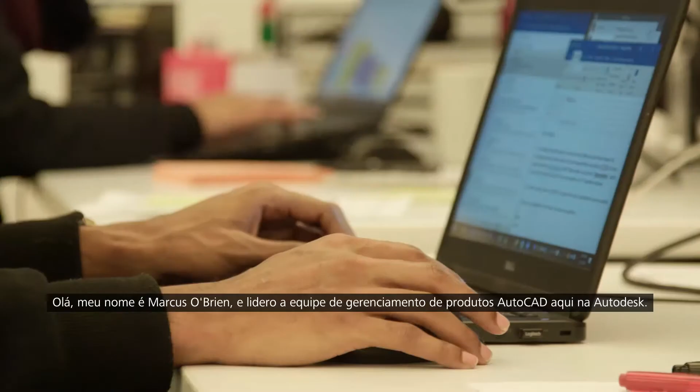Hi, my name is Marcus O'Brien and I lead the AutoCAD product management team here at Autodesk. We create software used by the most cutting-edge architects, engineers and designers from around the world. And this year our software allows you to push the boundaries even further.

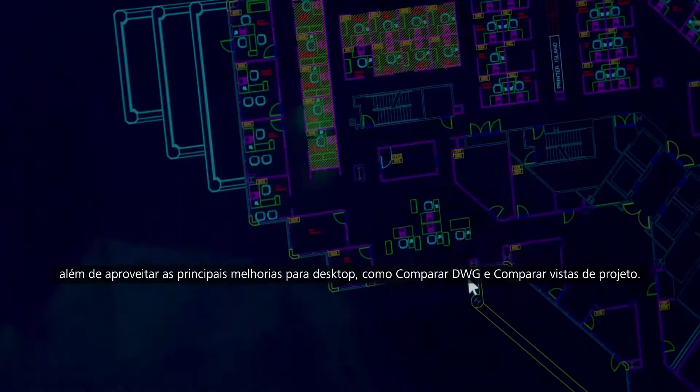When you subscribe to AutoCAD, you gain access to a library of specialized tool sets. You can take your work with you wherever you go with AutoCAD web and mobile apps, and enjoy core desktop enhancements like DWG Compare and shared design views. Today I'll show you how you can put the power of one AutoCAD to work for you.

Over the past 20 years, we've been investing in specialized tool sets to help make your AutoCAD as personalized an experience as possible. Today, I'm delighted to announce the next step in that evolution. When you subscribe to AutoCAD 2019, you get access to all AutoCAD industry-specific specialized tool sets, from mechanical to architecture to electrical design and more. Subscribing to AutoCAD, you'll always have the right tool at hand while working in a familiar AutoCAD interface.

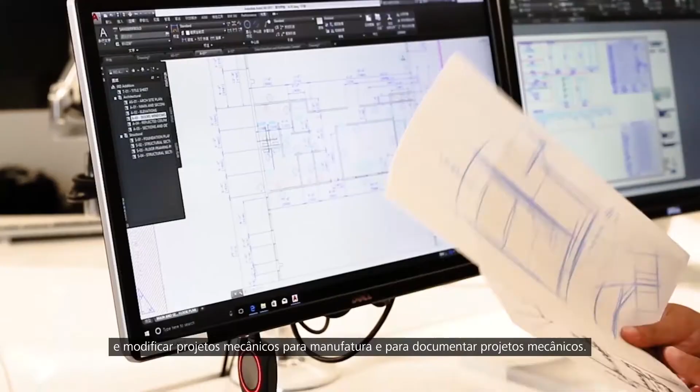So, how can AutoCAD, including specialized tool sets, help you work smarter and faster? Maybe you need a library of standards-based parts and tools for creating and modifying mechanical designs for manufacturing and documenting mechanical designs. The AutoCAD Mechanical Toolset allows you to automate mechanical engineering tasks such as generating machine components, dimensioning, and creating bills of materials, as well as access to 700,000 plus intelligent manufacturing parts, features, and symbols.

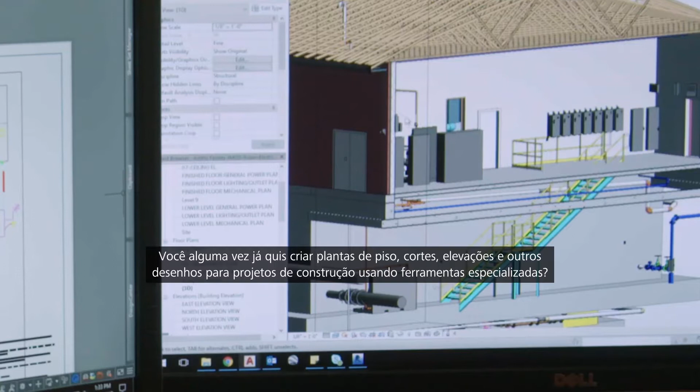Have you ever wanted to create floor plans, sections, elevations, and other drawings for building design using specialized tools? Why not take advantage of the included AutoCAD Architecture Toolset, which adds more than 8,000 intelligent architectural objects and styles and features specifically for architects?

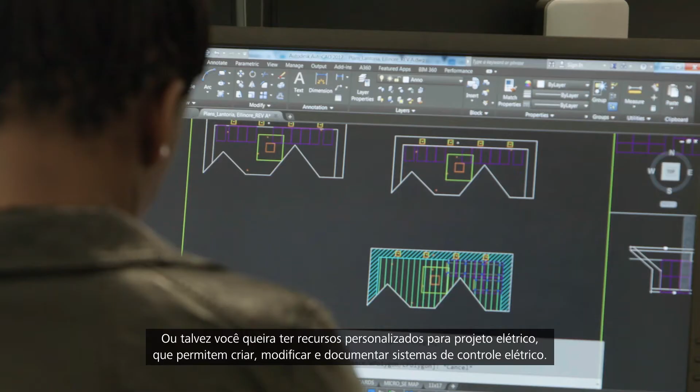Or maybe you wish you had features tailored to electrical design, enabling you to create, modify, and document electrical control systems. By installing the included AutoCAD Electrical Toolset, you can create panel layouts, schematic diagrams, and other electrical drawings using a library of 65,000 plus intelligent electrical symbols. In addition, you'll have access to MEP, 3D plant design, mapping, and raster design tool sets and libraries.

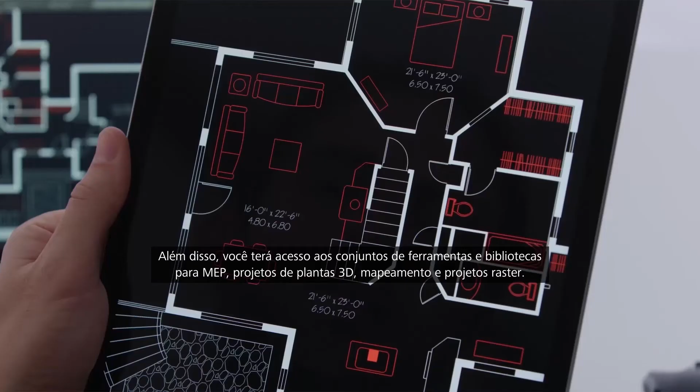Customers that currently subscribe to AutoCAD already have access to the AutoCAD mobile app, but this year we're adding more. As part of your subscription, you'll get access to the new addition to the AutoCAD family, the AutoCAD web application. For the first time, you can access original AutoCAD directly in your web browser.

The AutoCAD web app enables you to create, view, and edit your CAD drawings in a web browser from any device. There's nothing to download. Simply go to web.autocad.com and log in to get access. All the work that you do in the AutoCAD web app is accessible when you switch devices, so you can pick up where you left off when you work from home or off-site.

To make the most of the web and mobile apps, when accessing AutoCAD 2019 from the desktop environment, there's a new Save to Web and Mobile capability, which enables users to save drawings and make them available on a web browser and mobile device. In AutoCAD 2019, we've added new features and enhanced others.

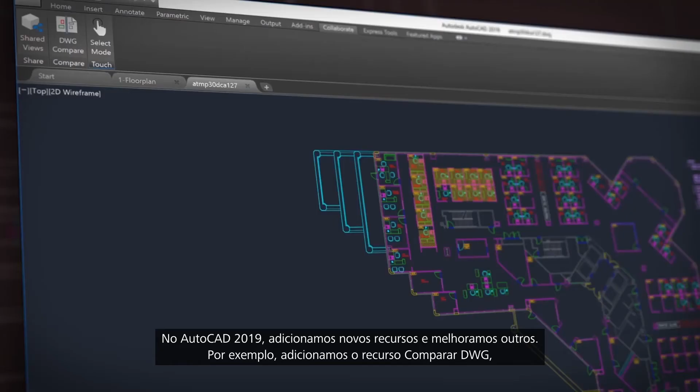So we have added DWG Compare, which overlays two drawings and highlights the differences between them. This makes it easy to review and understand the parts of the drawing that have changed.

We've made vast improvements to the 2D graphics over the past few years. This year is no different. You'll notice vast improvements working with draw order, raster images, and editing visual properties in large selection sets.

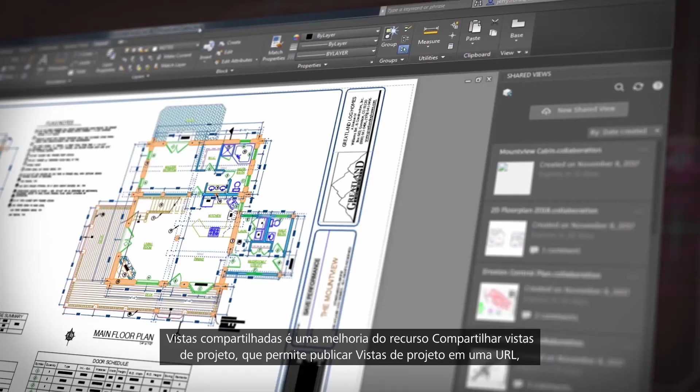Shared Views is an enhancement to the Share Design Views feature that allows you to publish design views to a URL so you can share drawings and get feedback from clients and stakeholders without sharing the DWG files.

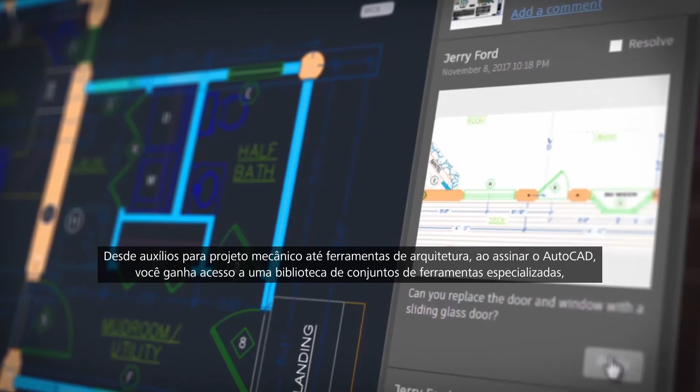So, there you have it. From mechanical design aids to architecture tools, when you subscribe to AutoCAD, you gain access to a library of specialized tool sets, can take your work with you with the web and mobile apps, and enjoy core enhancements included in AutoCAD 2019. There's only one AutoCAD. It's AutoCAD for everyone.